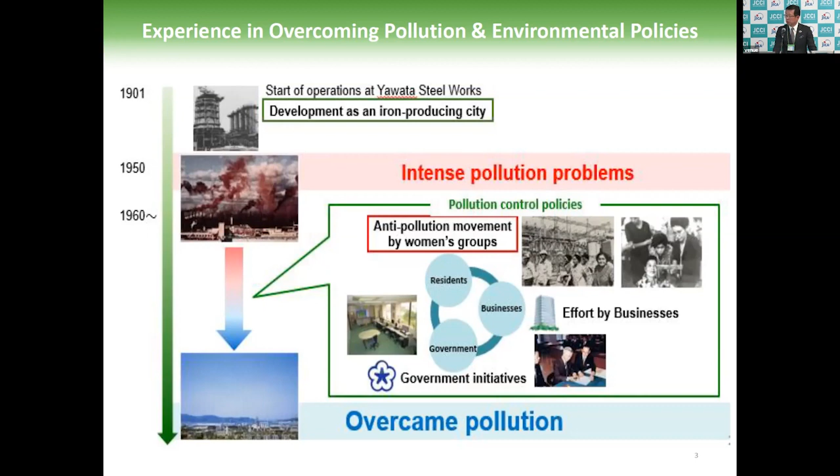Those that were first to take action against pollution were the citizens, including the women's associations. Such action led to a concerted effort by citizens, companies, and the government to reduce air and water pollutants, and through that effort, the city was successful in overcoming pollution.

Based on this experience, the citizens of Kita-Kyushu, including companies like ours, are working together to make Kita-Kyushu a model city for decarbonization in Asia. Various initiatives are being undertaken. We also want to take the environmental technologies and know-how that we developed overseas to support the resolution of issues such as decarbonization and contribute to the achievement of the SDGs around the world.

One of these activities is forest and peat fire control using soap-based fire extinguishing foams, which I will now explain. Our company's philosophy is to protect healthy body and clean water.

Founded in 1910 in what is now Wakamatsu-ku, Kita-Kyushu, Fukuoka Prefecture, this year marks the 113th year since founding. The head office is still in Wakamatsu, Kitakyushu City, with a branch office in Minato Ward, Tokyo. Our main products are additive-free household products such as soap, shampoo, and laundry soap.

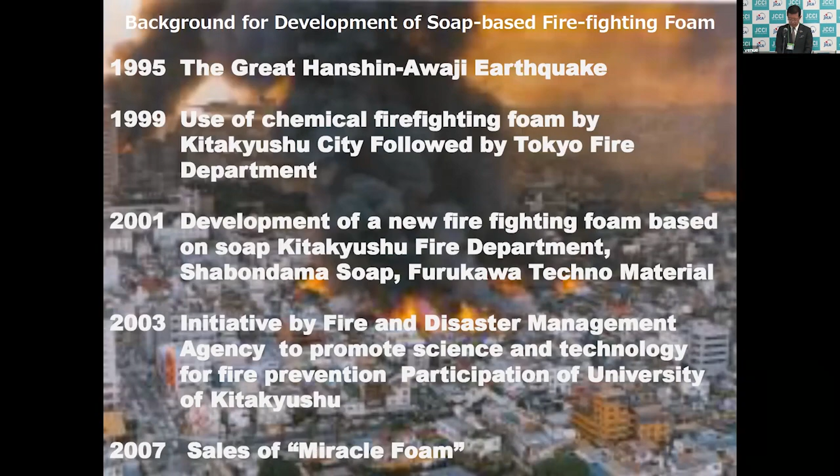So our company, as I explained, has consistently produced environmentally friendly products, and we were asked to develop a new fire extinguishing agent based on soap. We started development in 2001, and with the support of the national government and the University of Kitakyushu, we went through 7 years of iterative research and demonstration, culminating in the completion of a soap-based foam with world-leading environmental performance in 2007. Soap-based firefighting foam has 3 main characteristics.

First, they are highly effective in extinguishing fires by reducing the surface tension of water, increasing its penetrability, and lowering the temperature of burning materials. The second is a feature unique to soap-based agents: the foam decomposes after extinguishing the fire without staying in place indefinitely. Thirdly, it is environmentally friendly, which is of paramount importance today.

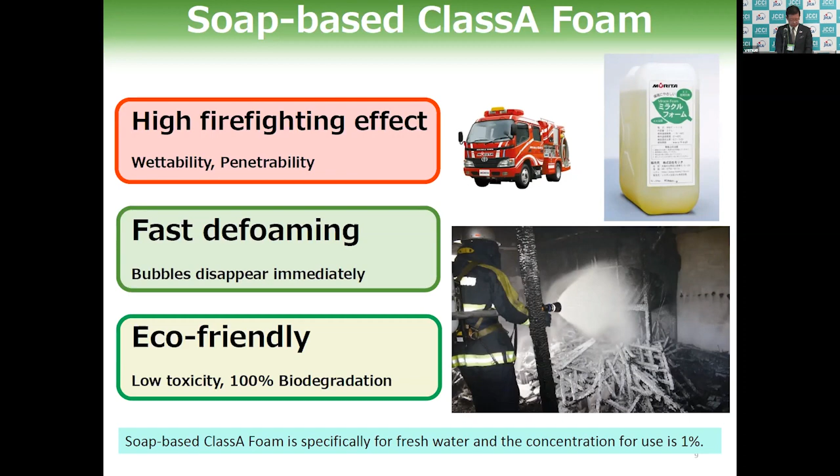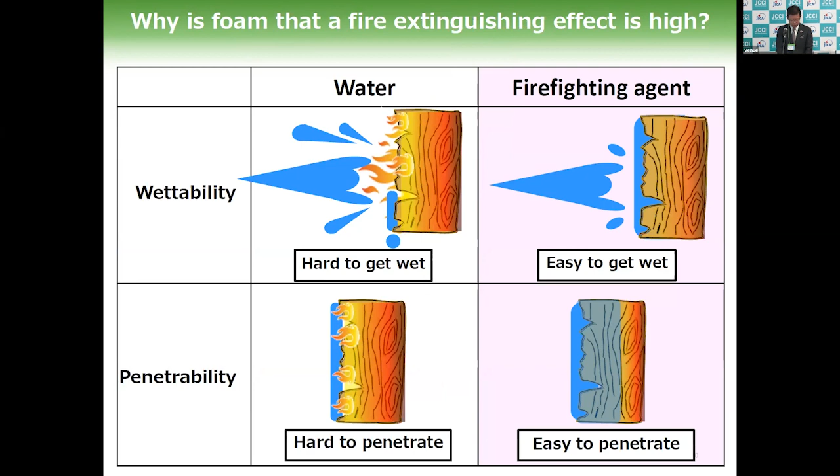The reasons for the high firefighting performance are: first, the surface tension of water is reduced by the extinguishing agent, increasing its wettability, so the agent is not bounced off the burning material easily. Simultaneously, by increasing its penetrating power, it efficiently removes heat and energy to prevent the fire reigniting.

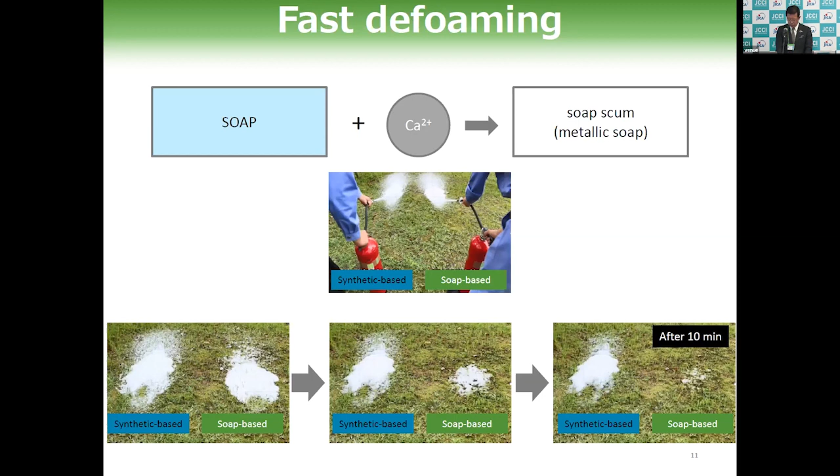The foam rapidly defoams after application as the soap combines with minerals in the ground and returns to nature. This picture shows a comparison of the difference with chemically synthesized foams: the soap-based foam disappears after just 10 minutes, whereas the synthesized one hardly disappears. The good defoaming allows fast and safe cleanup and damage assessment after a fire, so it also reduces the total cost.

In addition to the fire extinguishing performance and good defoaming, the most important thing we have considered is environmental friendliness, which, as I explained at the outset, has been a focus of the whole city of Kitakyushu. The main features include low toxicity to aquatic organisms, biodegradability so that the ingredients do not remain in the natural world, and no effect on plant growth.

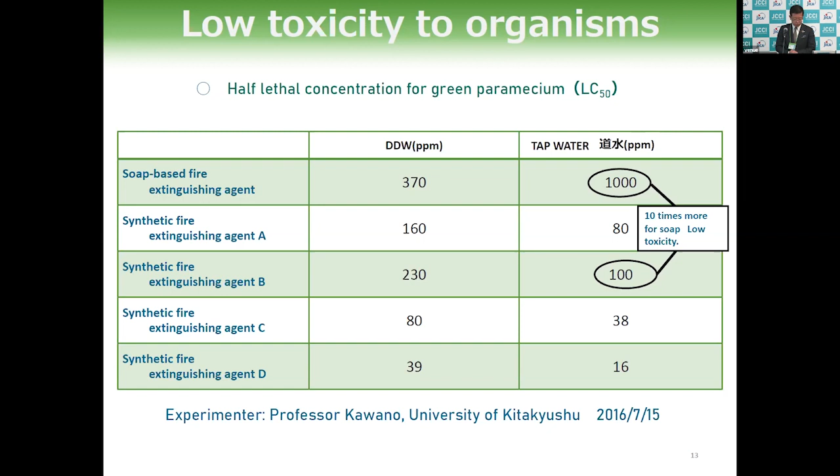Next, this table shows at what concentrations of soap-based and synthetic fire extinguishing agents mixed with distilled and tap water kills half of green paramecium. This is experimental data from the University of Kita-Kyushu. It shows soap-based agents to be about 63 times less ecotoxic than some synthetic foams and about 10 times less toxic than the best performing synthetic foam.

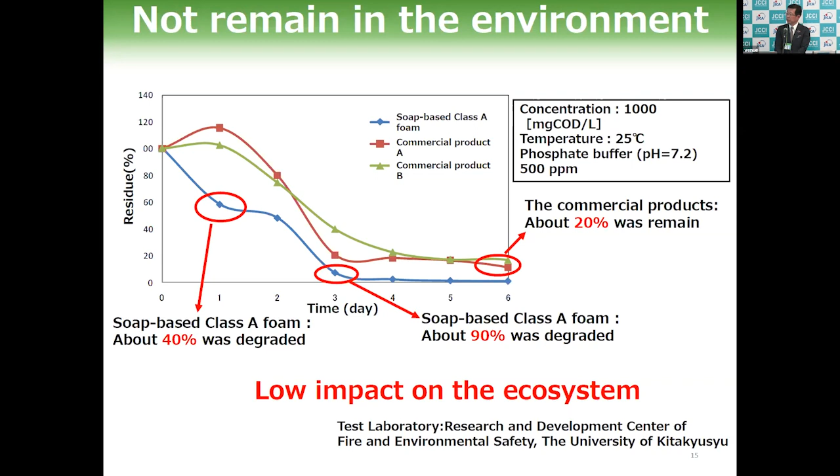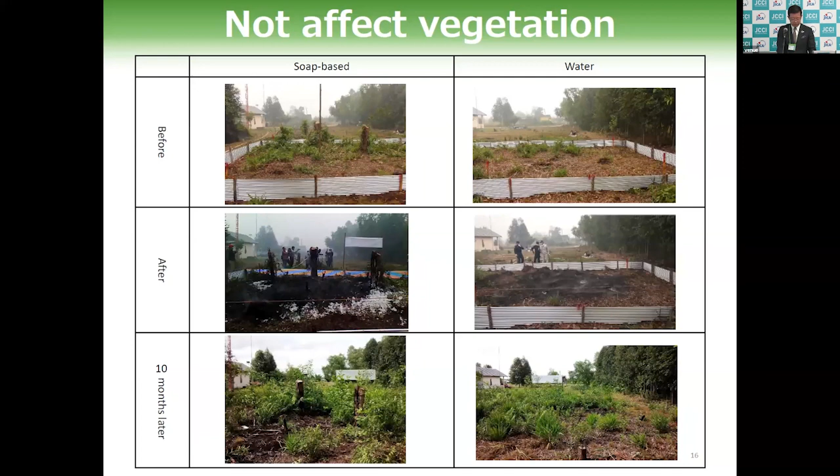What this photo shows is a part of a demonstration project to combat peat fires in Indonesia. Vegetation was burned under the same conditions, and the comparison was made 10 months later between fire extinguishing with water alone and with a soap-based foam. It's shown that grass and trees sprouted, exceeding the original vegetation, demonstrating that the soap-based foam had no effect on vegetation.

In a previous forest fire of similar scale, firefighters extinguished the fire using only water, but more water was required and it took longer to extinguish the fire. Although simple comparisons cannot be made because the conditions were not exactly the same, the amount of water required was 1.7 times greater, the time taken was 1.5 times greater, and the area burned was approximately twice as large than when soap foam was used.

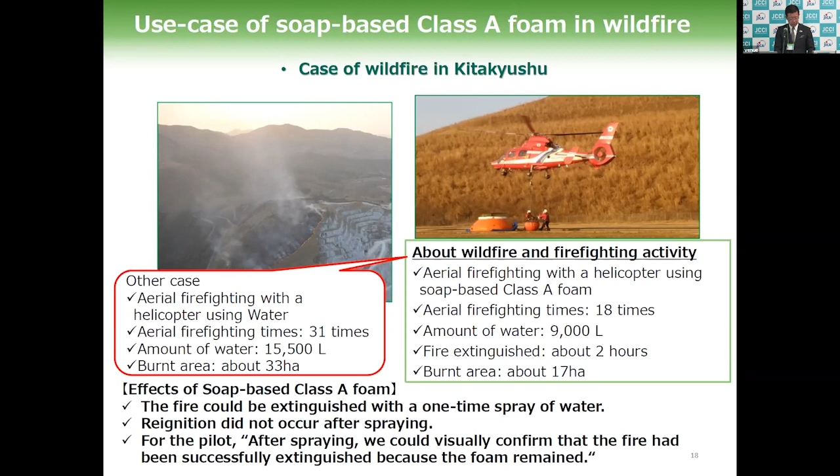Next, as an example of use other than actual fires, here's an example of use in securing safety during field burning. In Hiraodai, a limestone plateau in Kitakyushu City, in order to prevent forest fires damaging houses and crops and to ensure the safety of tourists, the local residents cooperate in burning an area of approximately 340 hectares in February and March every year. It's been planned for February this year as well.

340 hectares is equivalent to the area of about 380 football fields. The Kitakyushu Fire Department provides support by spraying soap-based firefighting agents around the perimeter of the area to be burned, in order to prevent the unintentional spread of fire.

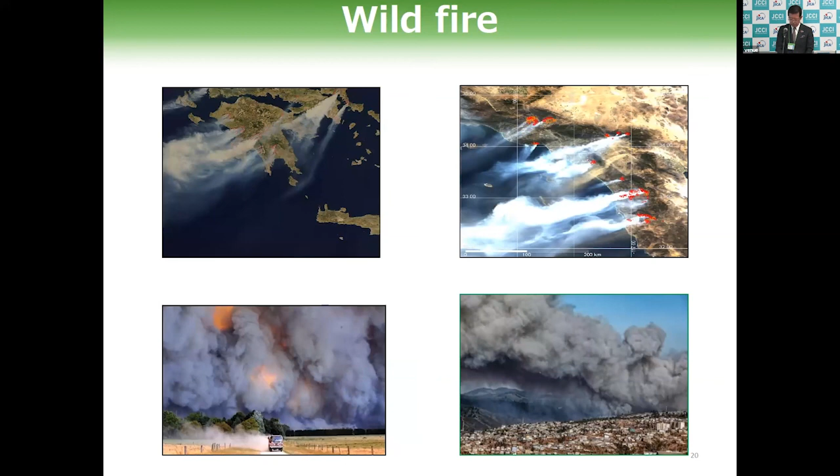As I've explained, soap-based fire extinguishing agents, which combine fire extinguishing performance, environmental performance, and good defoaming, are now attracting attention as a concrete and effective countermeasure for forest fires, which is an urgent issue worldwide. Soap-based firefighting foams have been introduced in various countries, mainly due to their excellent environmental performance. And in several countries, they have moved from demonstration stage to practical use.

We hope that your country will make use of this for the protection of forests and the environment, and we look forward to cooperating with you in reducing carbon emissions and protecting the global environment. That concludes my talk. Thank you very much.

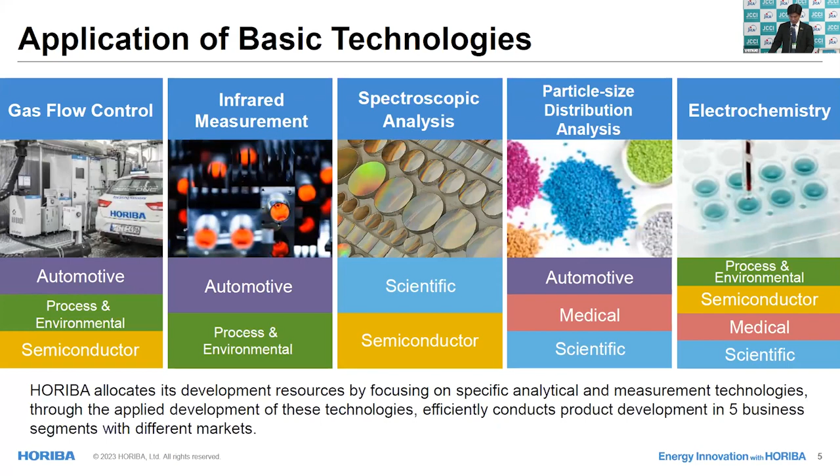This slide shows the outline of our business domains. Since we are mainly engaged in B2B business, our products and services are rarely seen directly by people in their daily lives, but they support people's daily lives everywhere based on measurement technologies. HORIBA has 5 distinctive core technologies: gas flow control, infrared measurement, spectroscopic analysis, particle size distribution measurement, and electrochemical analysis. We apply these technologies to our automotive, environmental, medical, scientific, and semiconductor businesses, and conduct business based on the keyword of measurement.

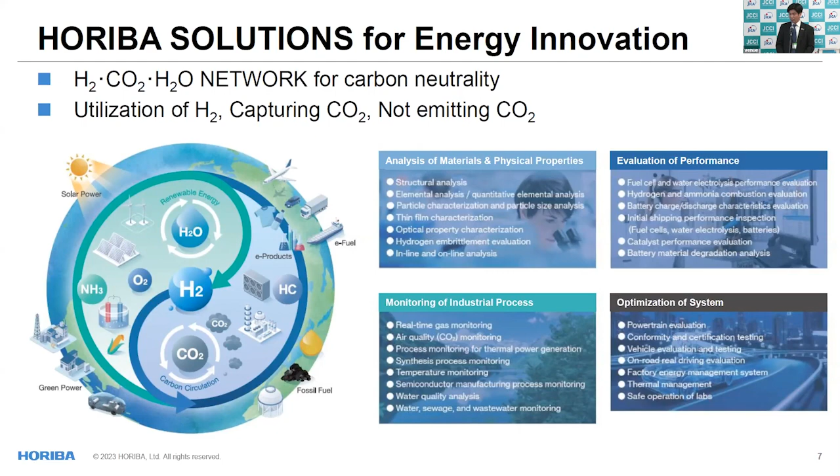To achieve a carbon neutral society, it's important to avoid emission, capture carbon dioxide, and utilize hydrogen. These 3 are key actions. HORIBA is focusing on circulation of hydrogen, water, and CO2 through the 4 technologies shown here: analysis of materials and physical properties, evaluation of performance, monitoring of industrial processes, and optimization of the system.

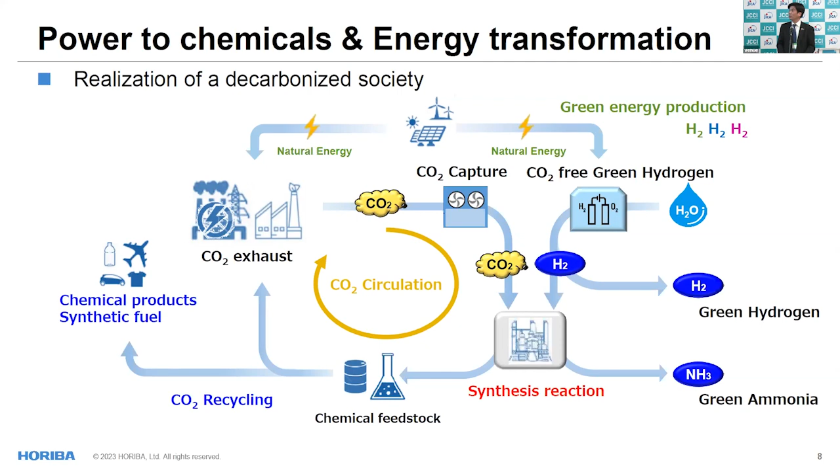Here's one example. The main part of this process is the synthesis of hydrogen and CO2 to produce fuel. From a carbon neutral point of view, the hydrogen used in this process must be green or purple hydrogen, which does not emit carbon dioxide during production, or blue hydrogen after carbon capture. CO2 must be recaptured from the emissions of the combustion process. This process creates a circular cycle in which CO2 is trapped and not emitted outside.

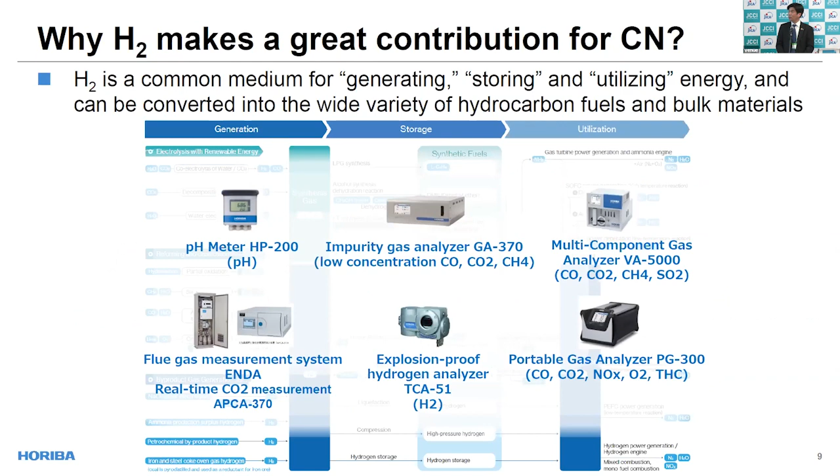Throughout this conversion process, HORIBA's scientific analysis and pH meter, gas analyzer, and gas monitor can contribute to the technological development and energy production toward carbon neutrality.

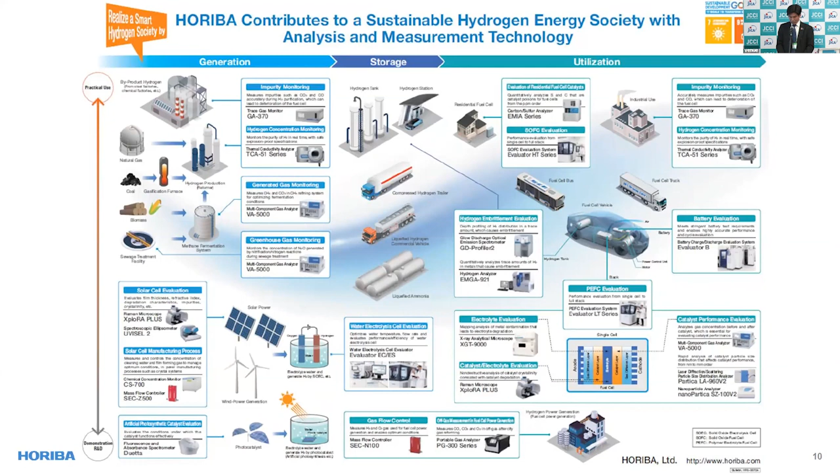Recently, use of hydrogen is becoming important. This diagram shows applications HORIBA can propose for the production, storage, and use of hydrogen. When producing hydrogen, measuring the concentration of impurities in hydrogen during the production process can lead to a reduction in hydrogen production costs. While many new materials are being developed for the use of hydrogen in fuel cell vehicles and household fuel cells, HORIBA's scientific analysis equipment is used for these purposes, including systems for fuel cell evaluation, our analysis equipment used in diverse fields of hydrogen.

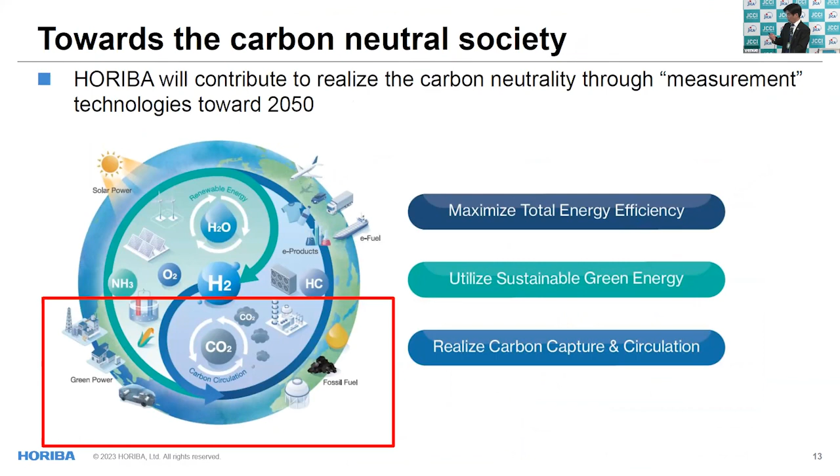Let me touch upon the measurement needs for CO2 recovery. In the US, Section 45Q was introduced in August last year, which is a substantial tax credit system for CO2 recovery and storage, expected to invigorate the CO2 recovery market. As I mentioned earlier, the presence of overseas offices around the world should help HORIBA access the up-to-date CO2 recovery market information.

In CCS plants that capture CO2, we have grasped the three latest customer requirements. One is the monitoring of CO2 concentration during transmission through a pipeline or burying underground to calculate the amount of tax credit customers can receive.

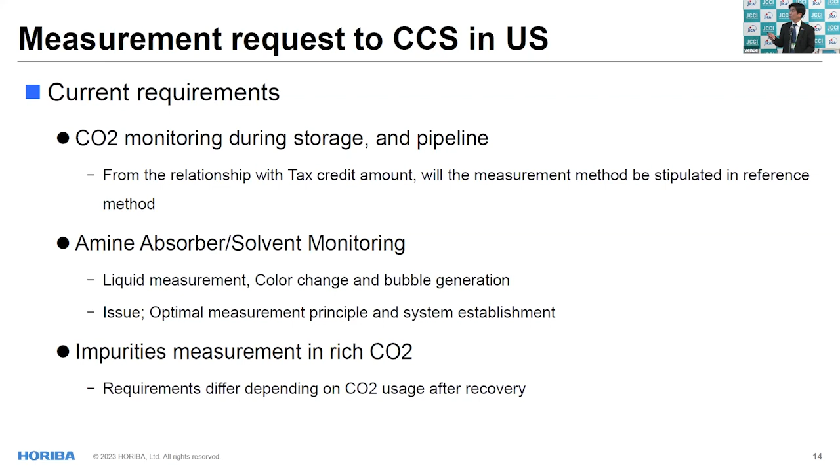Next, I will explain about the deterioration of amine solution used for CO2 recovery and the need for monitoring impurity concentration during CO2 recovery. Amine solution is used to recover a large amount of CO2. It reacts with CO2 at low temperature in the absorption tank and releases CO2 after high temperature reaction in the regeneration tank. The process is repeated to recover more CO2.

Our gas analyzers and liquid analyzers are used in these types of plants. Gas analyzers are used in front of the absorption tanks, as well as inside. Amine solution tends to deteriorate due to repeated cooling and heating processes.

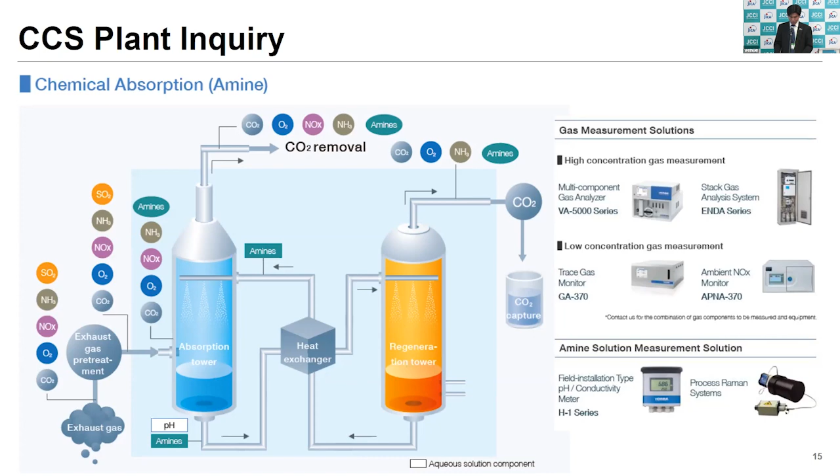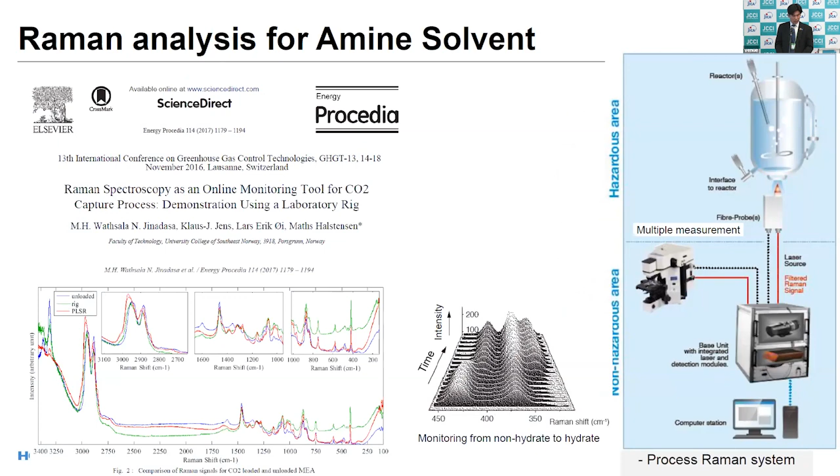By using this IRLAM technology, we can detect certain peaks that were difficult to detect with the conventional infrared absorption measurement principle, thus reducing the influence of the base gas while performing more accurate measurement. In addition, the device is capable of wet sampling, where the gas in the pretreatment section and the analysis section is heated and aspirated so that the target can be measured without dehumidification, even if it contains moisture. Those low concentration substances can be measured for better management of CO2.

As I said, in my company, through measurement technologies, we are trying to contribute to the carbon neutral society for renewable energy and new material development, gas measurement for CO2 recovery, and gas measurement for CO2 recycling. Our gas and chemicals measurement systems are instrumental for all of these four areas.

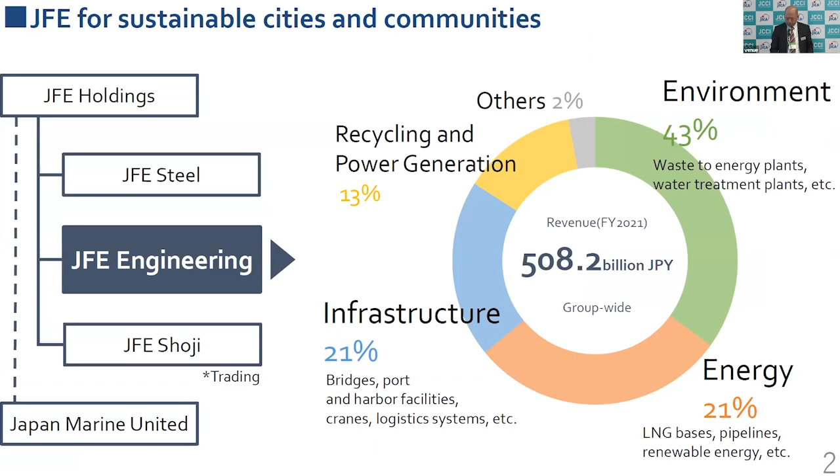It's a very great honor to make this presentation about waste management solutions for carbon neutrality and also the circular economy. JFE Engineering is the engineering business arm of JFE Group. The JFE Group is one of the largest corporate groups in Japan. JFE Engineering works in various types of infrastructure business, such as environment, energy facilities, infrastructure like bridges, and also the recycling business in this global market.

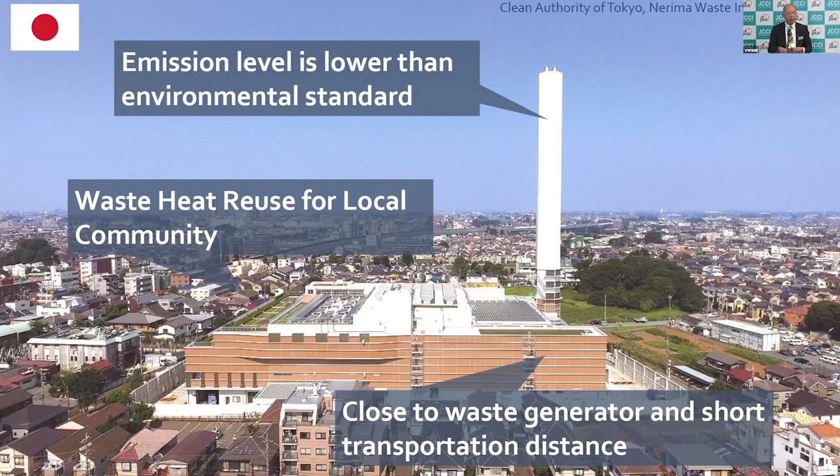Electricity or hot water is supplied to residents nearby from this very safe and secure plant. Also, since this plant is very close to the source of waste, it not only reduces transportation costs, but also reduces dust, odor, and noise during waste transportation.

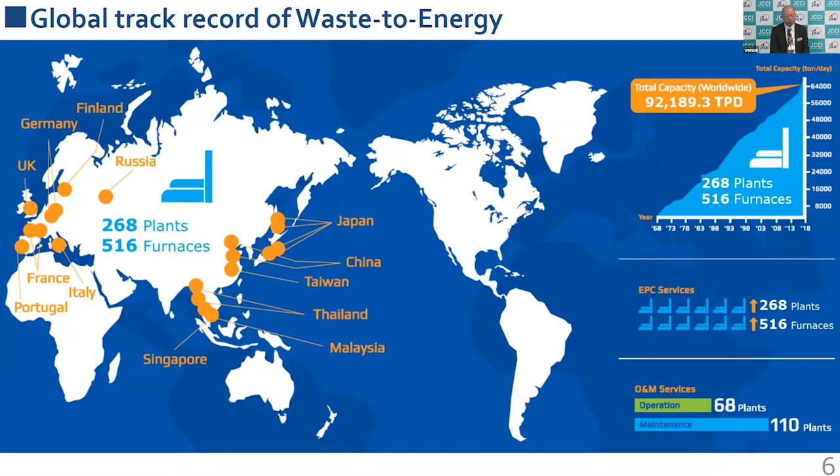We at JFE Engineering have a very large number of global track records of waste-to-energy incineration plants, not only in Japan, but also in Asian countries and European countries as well. From this track record, I'd like to introduce JFE Engineering's very latest case.

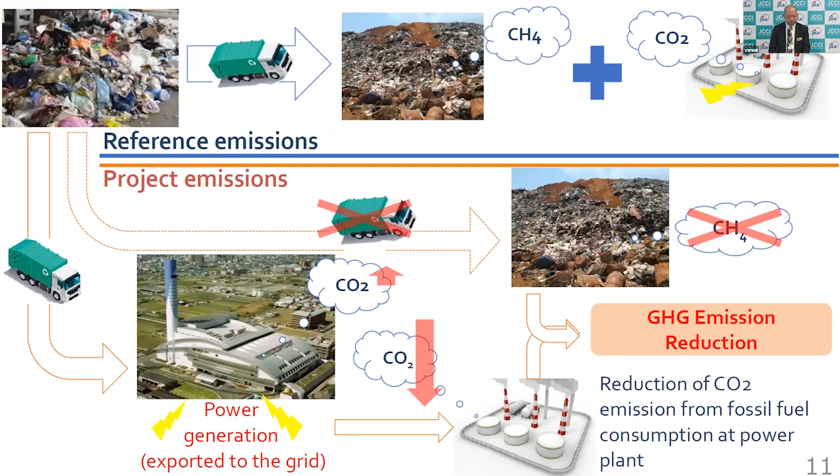The electricity generated by the waste-to-energy incineration system displaces electricity from a grid which is generated using fossil fuels. For the most appropriate waste management, in addition to the 3 R's, energy recovery at the waste-to-energy plant and proper dumping or proper landfill - these two additional items must also be carefully considered if we are thinking about a circular economy for your country, for your residents.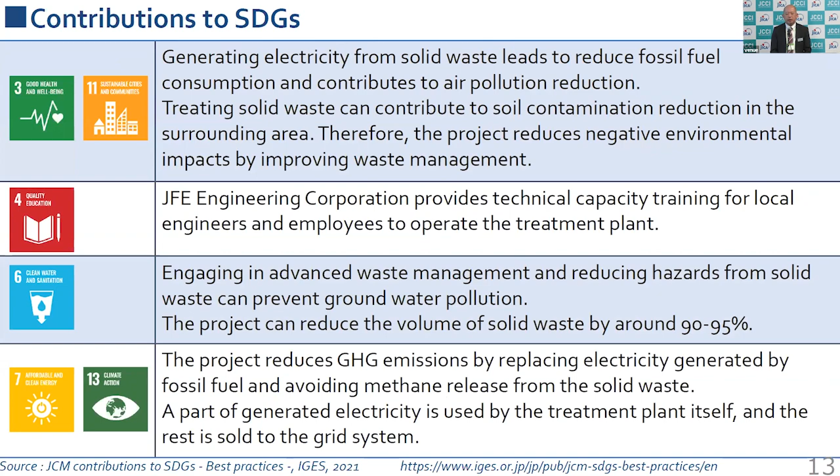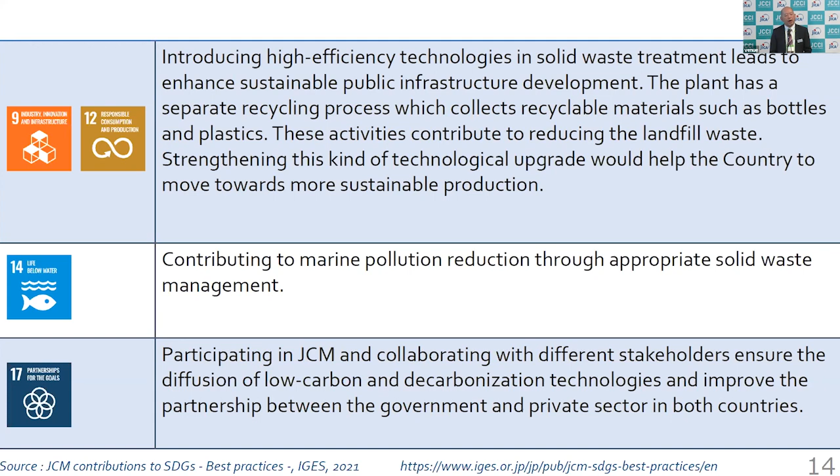As I explained, because of these kinds of multi-benefits by the waste-to-energy incineration project, the technology is also clearly recognized. It would also contribute to various SDGs for the people - not only number 3 and number 11, but also, for example, number 9 or number 12. If we are thinking about the marine plastic waste issue, it is also very good for SDG number 14.

JFE is just for the Earth. So if you're reading only the big characters, 'just for the Earth', you can kindly find our company name, JFE. So our mission, JFE's mission, is to create a safe and secure society to strongly support people's lives and to pass this on to the future generation. This is the end of my presentation. Thank you very much.

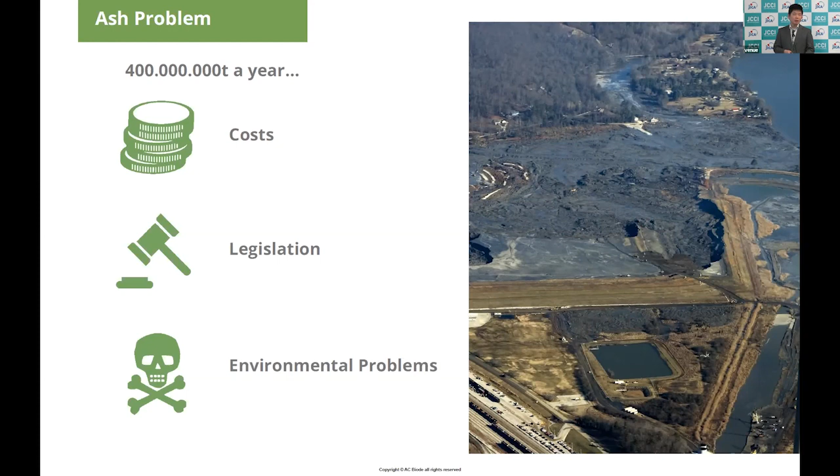Ash or waste is one of the biggest problems, mainly from biomass power plants, coal-fired power plants, municipal waste incineration, paper facilities, sewage sludge incinerators, as well as mining waste. It costs quite a lot of money—100,000 or millions of euros every year just to dispose of this waste, because it includes heavy metals and is not easy to handle.

Right now, ash mainly goes to landfills or is mixed with asphalt or concrete for construction materials, which is a lower value use than it should be. So we upcycle this waste into adsorbent in powder form, as you can see here. This powder can be used as adsorbent, such as filters to capture CO2 and methane.

It can also be used for soil improvement, water treatment, and capturing nuclear waste such as cesium. We have already commercialized and are selling these products mainly in Japan and China, and want to expand this business into different countries.

Here's one example where it captures CO2. It is equivalent to zeolite, which is already in the market, but we are the only one in the market that upcycles from waste.

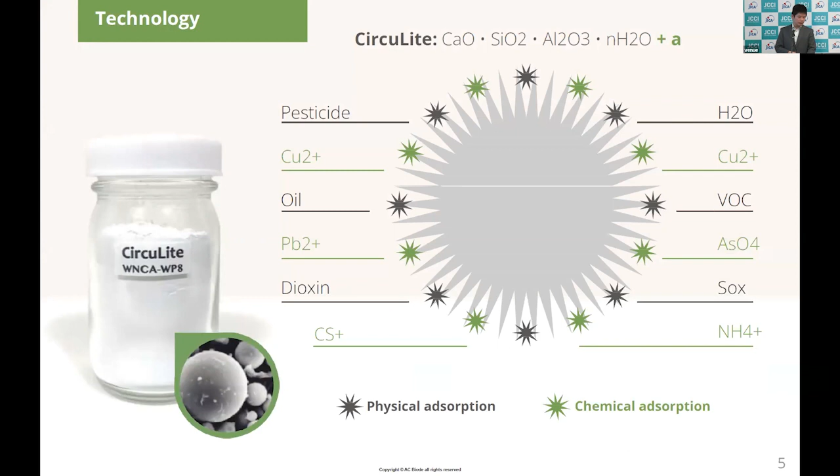This is how our products look. It captures not only physically, but also chemically through an ion exchange structure, so that we can expand or improve adsorption capability.

There are existing products called activated carbon, or kasseitan in Japanese, and zeolite. Compared with existing products, as I mentioned, we are the only one that recycles from waste. Our production costs are cheaper, and the adsorption capability is also higher.

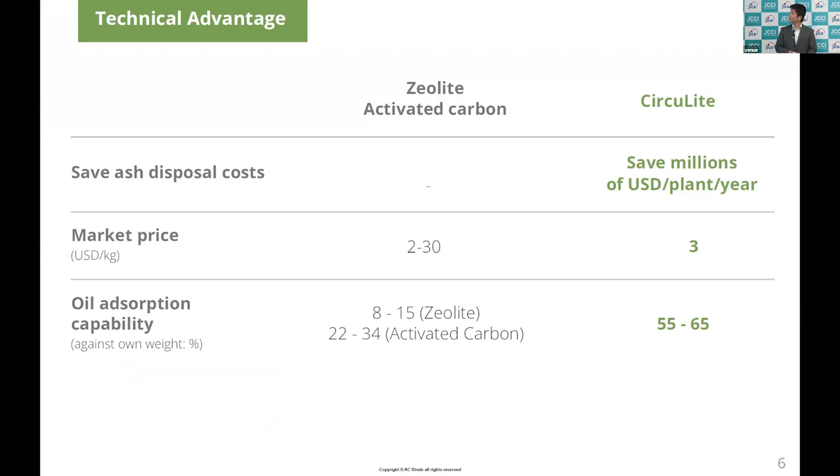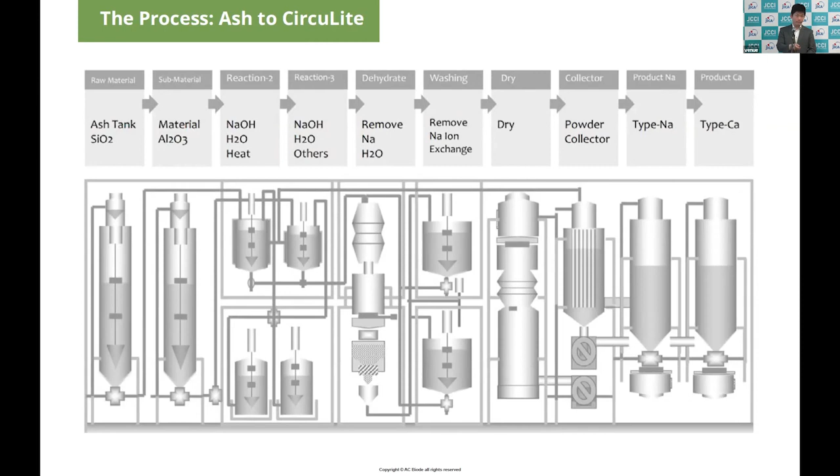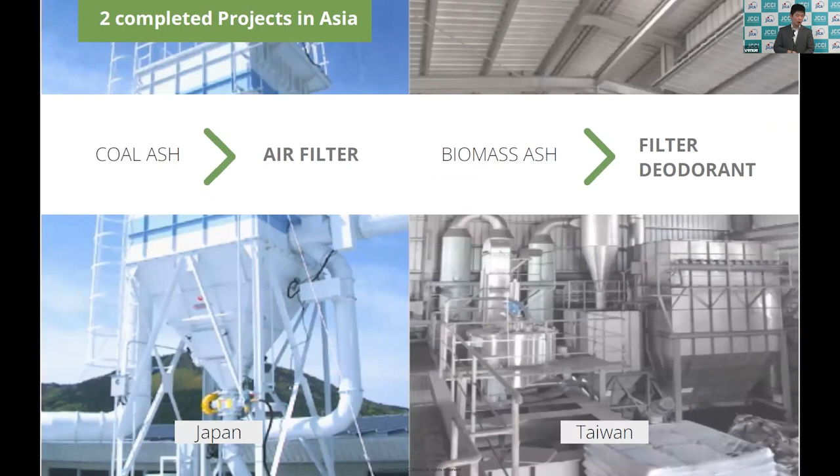With Seon Corporation in Japan, we have built two facilities successfully—one in Japan from coal ash, and the other in Taiwan from biomass power generation.

Right now we have around 12 contracts, such as in Kazakhstan, Thailand, Australia, Austria, Italy, and the UK, as well as one project in Bangladesh to recycle coal waste.

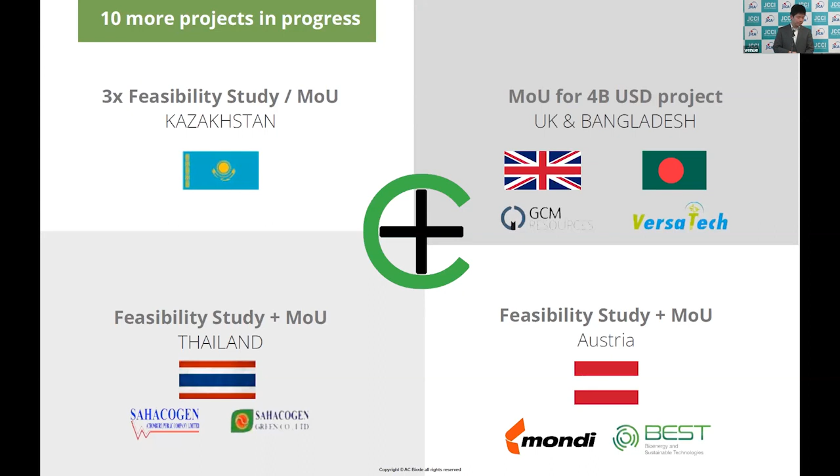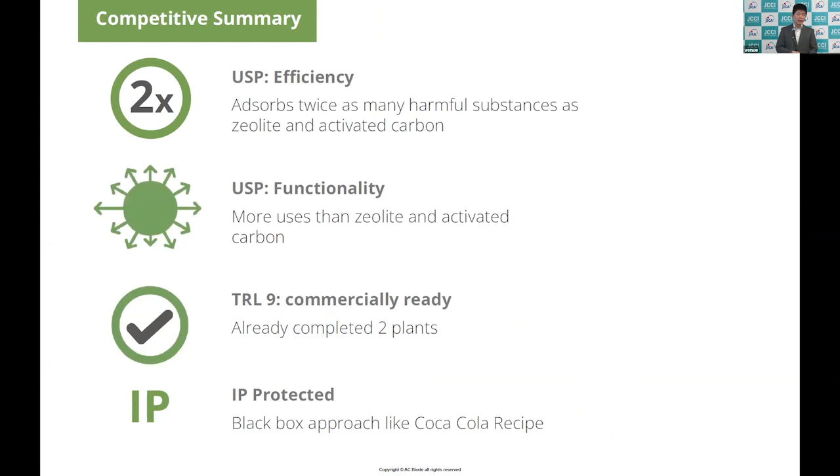To summarize, as far as we know, we are the only one recycling ash into adsorbent and have already commercialized it into the market, as well as secured some know-how, recipes, and a patent on this.

In terms of how we do business, we don't make machines or build facilities ourselves, but we provide engineering services to the owners of ash generation or waste, such as energy companies or paper companies.

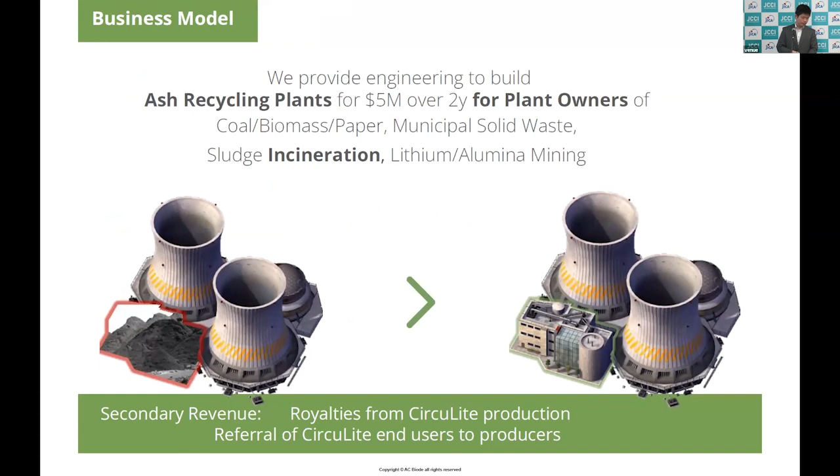The market itself is growing steadily at around 3.4% for each adsorbent market, so we want to tackle a couple of market shares within the big adsorbent market.

Right now, our startup is still young, only 3 years old. We now have 10 members, mainly engineers—chemists, mechanical engineers, and chemical engineers. We have raised funding from a venture capital firm within the European Union called EIT InnoEnergy, and also just last year raised funding from Genesia Ventures, a venture capital firm in Japan.

So that's it for now. If you have any questions, either in English or Japanese, please feel free to reach out to me. Here's my email address, and you can ask me any questions.

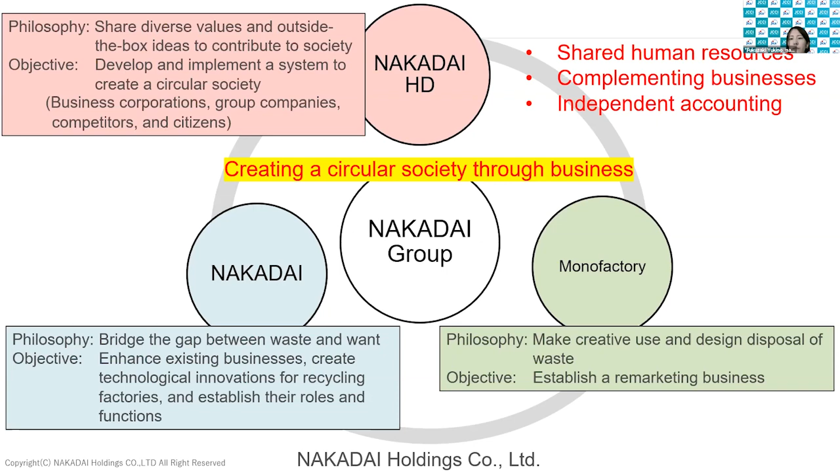These are the philosophies and purposes of each entity, but I will skip this slide. The point is that we are supplementing and complementing each other to create a virtuous cycle.

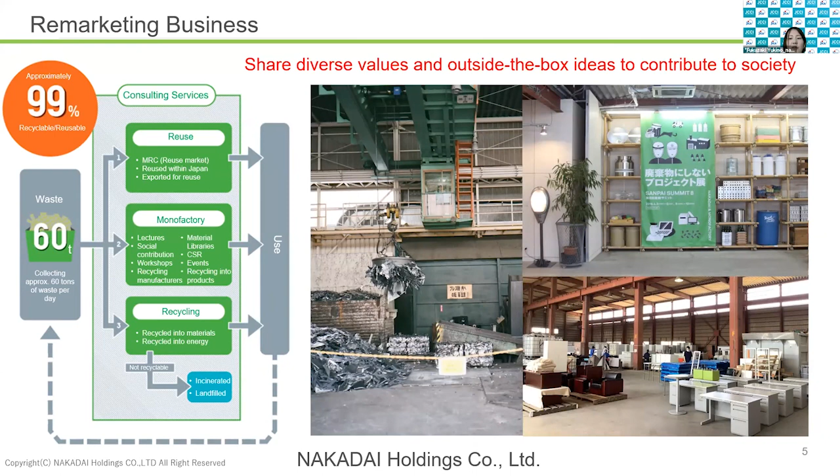Our group is conducting a so-called remarketing business. It's not only recycling or reuse. Once waste is generated, the point is how to recycle it back into society, and before something becomes waste, how we can make sure it is recyclable. That's the perspective we are taking.

Specifically, in terms of the amount of waste we handle, let me talk about some numbers. Our company is located in Gunma Prefecture, but Japanese waste management is a licensed industry, so it is strictly regulated by law. We cannot unlimitedly expand the facilities, so even if assembling a lot of waste would be good for us, we can't do that. Therefore, we focus on the process, and on the needs and demands of the people who generate waste and the people who want to utilize it.

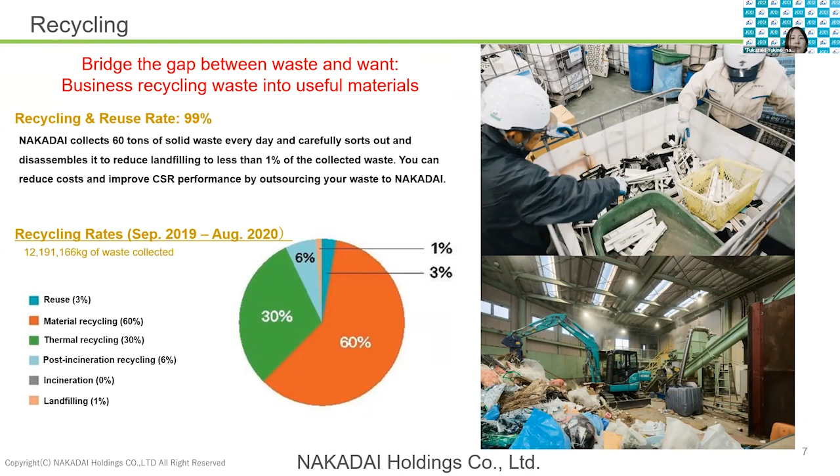About 60 tons of waste comes to the plant, and we achieve 99% recycling. We use large facilities and equipment, but we focus on the generation of new materials. Therefore, decomposition and cleaning is done by hand, manually, and our employees know that once they touch something, they can tell exactly what material it is. So we have highly skilled employees.

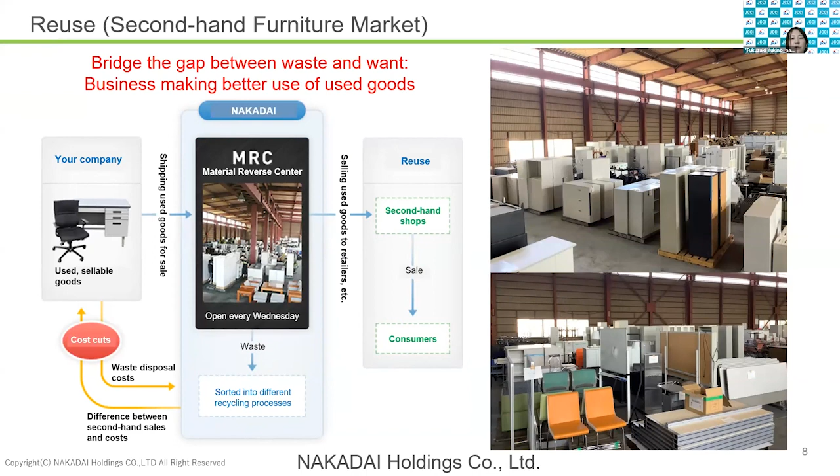It's not only recycling, we also do reuse business. As you can see in the picture, we have office equipment like lockers, tables, and chairs, and we have a marketplace. Every week, a 10-ton truck worth of used office equipment comes in, and then we run an open market and marketplace system.

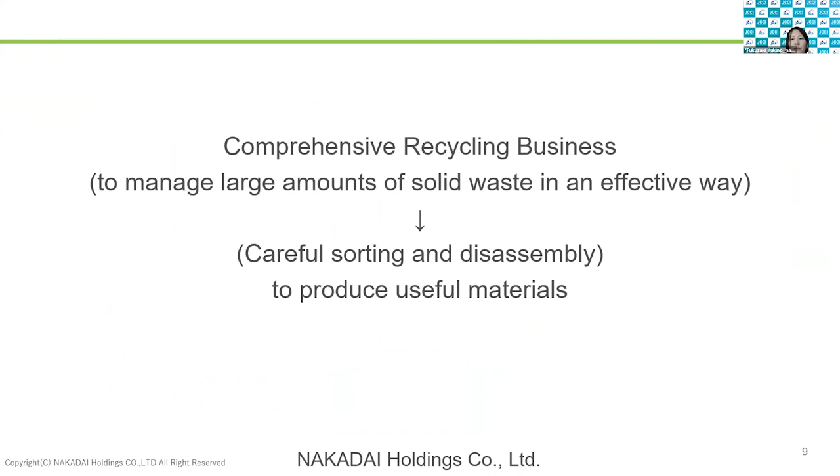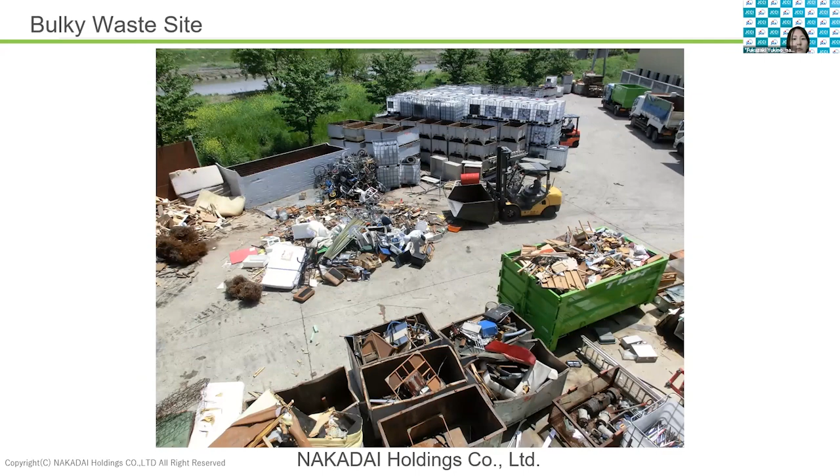We use manual work in the sorting and selection of waste so that we can still retain the value of used equipment. This is our facility. There are many visitors; in the summertime, lots of children come for the plant tour. Manual work is important, but we also deal with general waste coming from households.

It's not only recycling, we use waste for other purposes. This shows our material library. For each type of material we sort, you see a very interesting set of materials available from waste. We just put them together on display, and it makes a very interesting display. We also sell those raw materials.

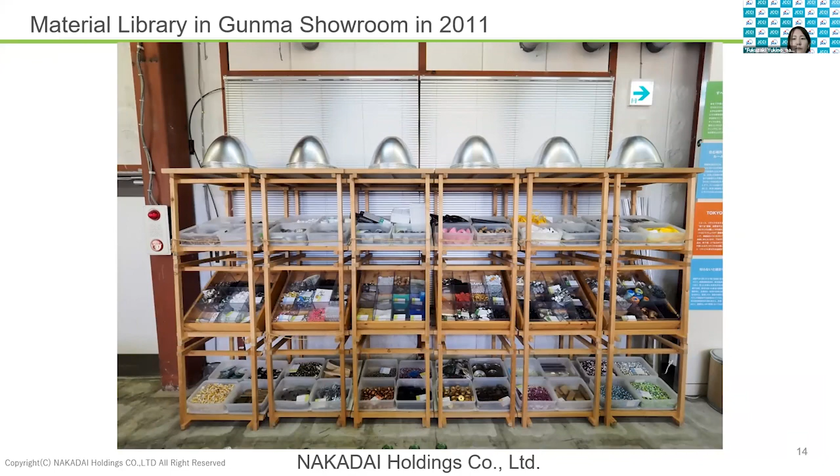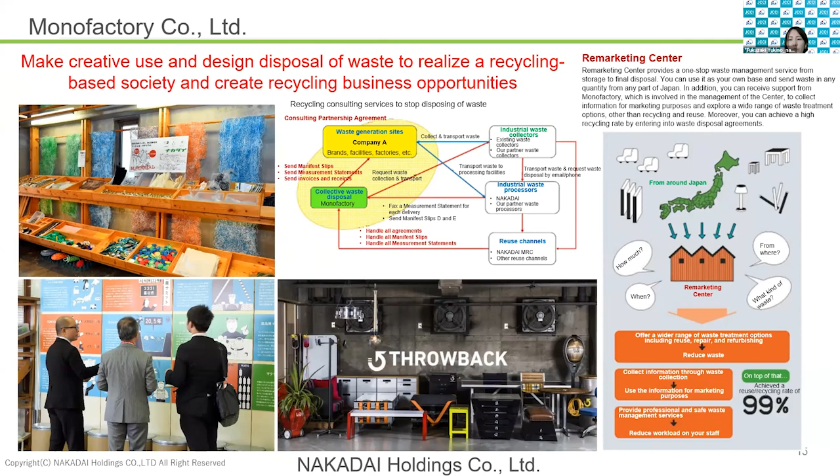The materials themselves are displayed, but it's not only that. We try to prevent the generation of waste and create mechanisms for collection and recycling. We provide a consulting service. When waste is mixed with different things, sometimes it becomes uncontrollable and it's very difficult to put it back into raw material. But before someone disposes of any equipment, if we take action, we can increase the chance of recyclability. That's why process design is very important.

Next, I'd like to talk about turning waste into business purposes. This shows plastic waste reduction efforts, which you may be aware of. In 2018, China banned imports of plastic waste. In the past, China was importing a lot of waste from Japan and other countries, but then they stopped importing that waste. So domestically, we have a lot of waste stagnating.

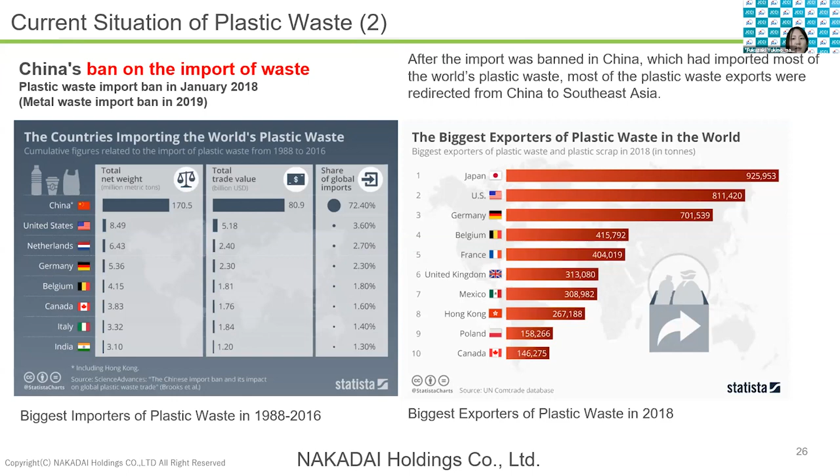We are trying to export to Southeast Asia, but there is more and more regulation on this waste. Because of this regulatory situation, it was shocking that China banned these imports. It was a big topic in our industry, because suddenly the door was shut and we had to deal with all the waste in Japan. The fact that we have to deal with waste generated within Japan may sound absurd, but in fact, Japan didn't do that in the past.

So we have to have a recycling system which does not rely on other companies, other countries. If we don't do anything, people cannot dispose of waste so freely. For example, per month, a 45-liter bag, maybe only 2 will be provided for each household, and then households cannot dispose of things so freely. So rather than just selling, recovering the waste and recycling from waste will be key critical questions for the country as well as for society as a whole.

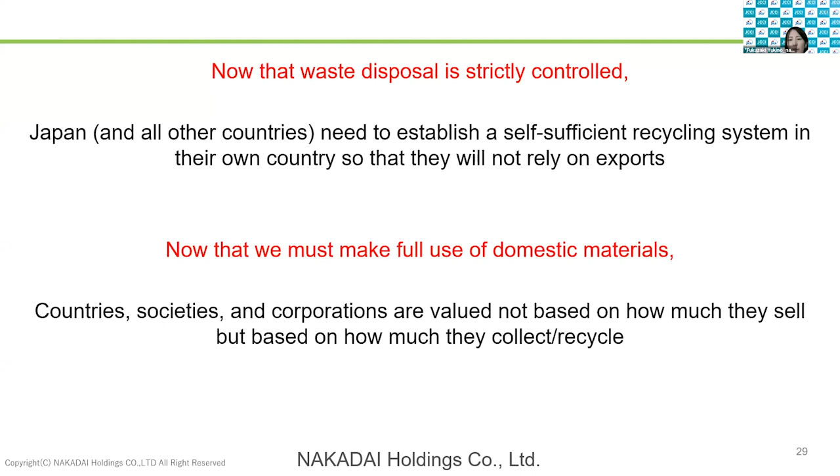Having said that, the recycling system in Japan, well, it is not so easy as it may sound. But we have a new initiative together with Kyushu Electric Power Company called Circular Park Kyushu.

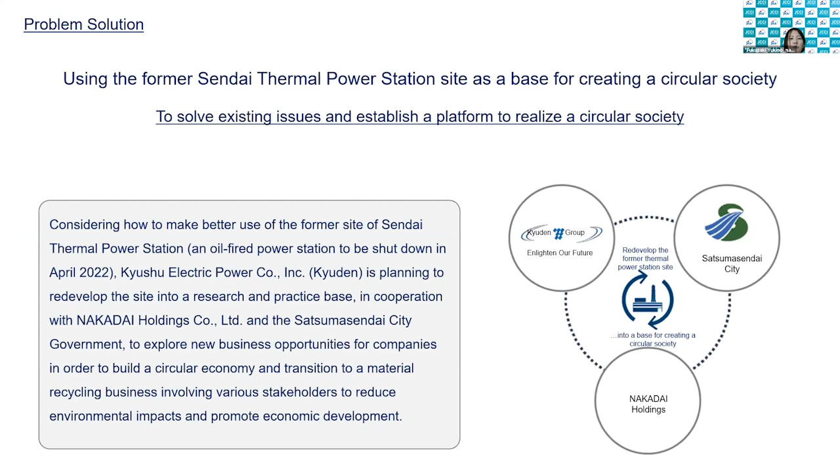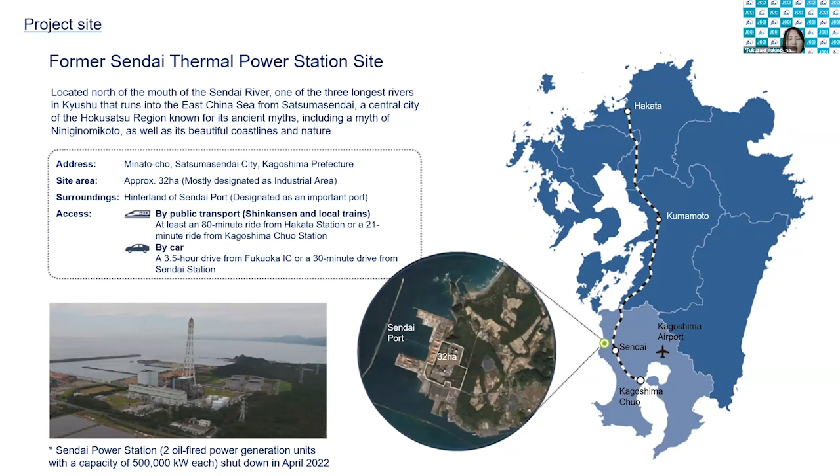The green circle part shows the exact location of the plant. And this is an open innovation in order to realize that this location will become the center for such collaboration.

Lastly, let me show you the flow of waste and how we can utilize this for education purposes for companies as well as for consumers. We let people try and do the recycling by themselves, and also together with university students in group work, we try to segregate different waste into different resources through the workshop they experience.

And the kids come to the facility, and they decompose PCs, for example, to see what kind of materials are included. So Japan is trying to establish a recycling business from now. To the rest of the world, well, we have a common issue, the waste problem. So we would like to promote collaboration with other countries as well. That's all from myself. Thank you very much.

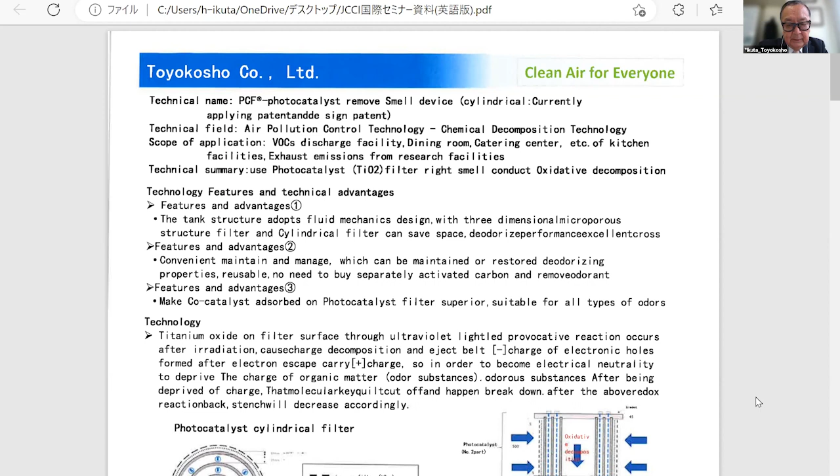So the technology itself, well, we have titanium oxide. This is the photocatalyst. Basically, we have the sheet type. Our technology's focus is to decompose the source of odor.

I do talk about some characteristics in this document, but if I talk about the cylindrical type, in the past it was just a flat type, but by making it into a cylinder or column, we now have these 3D cell filters and cylindrical cartridges. So this really saves space.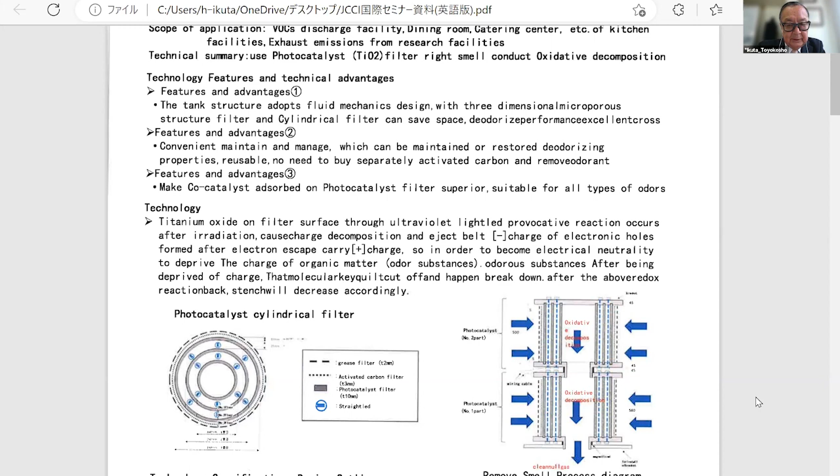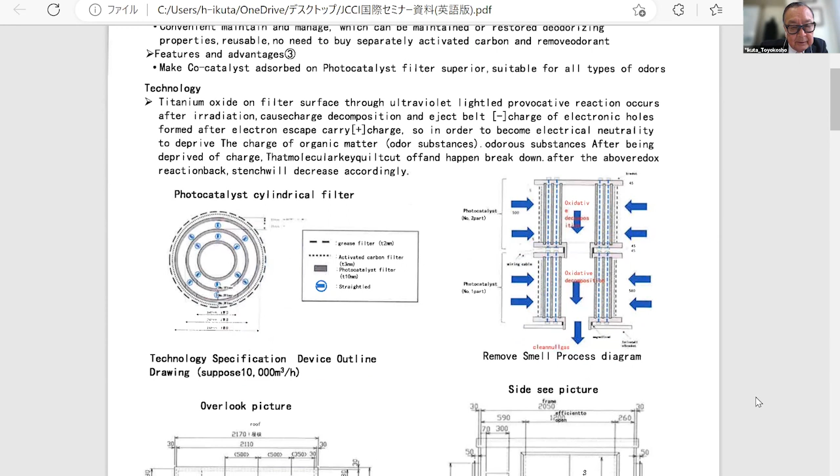And also, the deodorizing capacity has been reinforced. It may be a bit difficult to see here, but basically, if you look at the cylinder, it's a 5-layer structure: there's the grease filter on the outside, then there's the activated carbon filter, and then there's the photocatalyst filter.

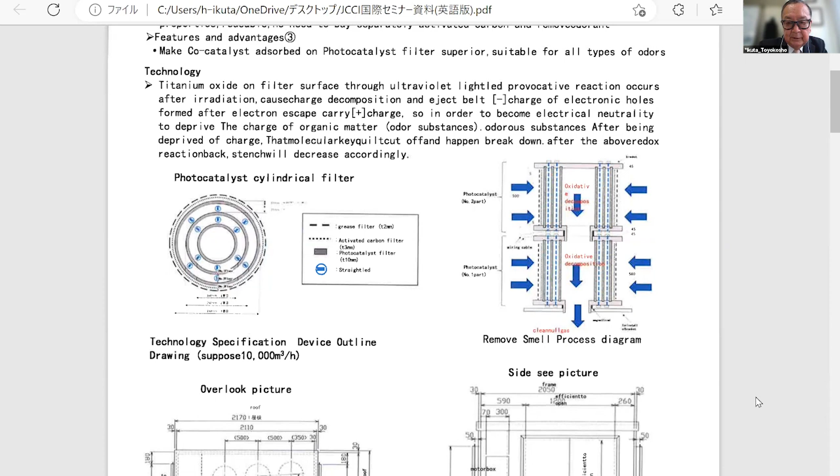So it will be attached top to bottom, that's 2, plus it's going to be positioned in parallel. So this is a 360 degree device to absorb the odor to be decomposed. Oh sorry, that's a cross section, so that's 2 cylinders on top of each other. So you've got layer 1 and layer 2. It's connected, but you can actually connect maybe 3 or 4 of these cylinder devices.

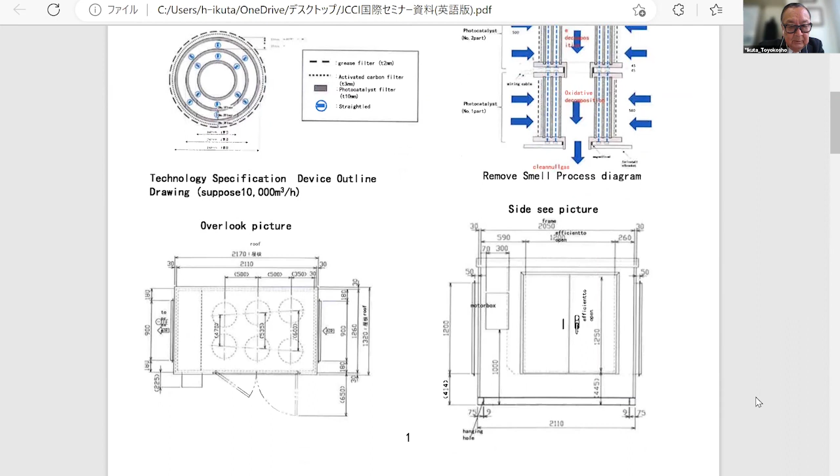And then on the bottom, this is a cross section looking at the device from the top. So there are 6 cylindrical devices, and because it's connected, we have 12 units here in this casing because they're connected on top of each other. So you come out from the right, coming from the right, and then you go through the left. So as the atmosphere travels, the odor is absorbed and the titanium oxide does the decomposition.

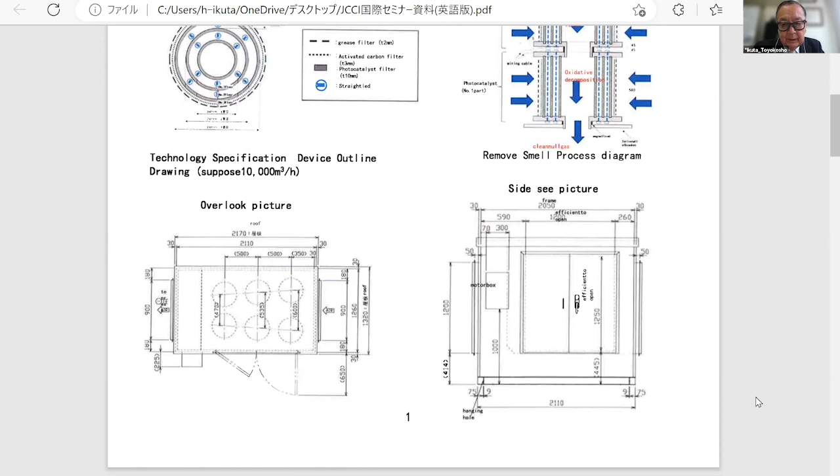And the right one, we see the side picture. This is the casing diagram. So if you look at the left and the right-hand side of this casing, you can see how it will look. It might be a bit difficult to imagine, but this is what we filed in our patent submission.

With regard to this deodorizing performance, according to our test data, based on the Kanagawa Industrial Institute test method, for acetaldehyde and toluene, all of that included, we have been able to achieve more than 90% of deodorizing performance.

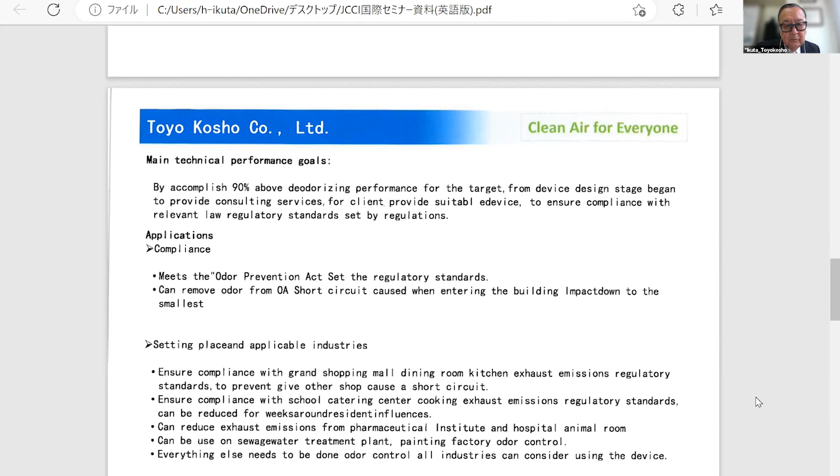So from the design, we provide consulting to design the device. Some applications or examples - basically in Japan, this is so that people can meet the offensive odor control law. And also, Japan, Taiwan, Korea, China and Thailand actually measure, and also maybe Vietnam very shortly - they have the same measure of odor according to these legal regulations.

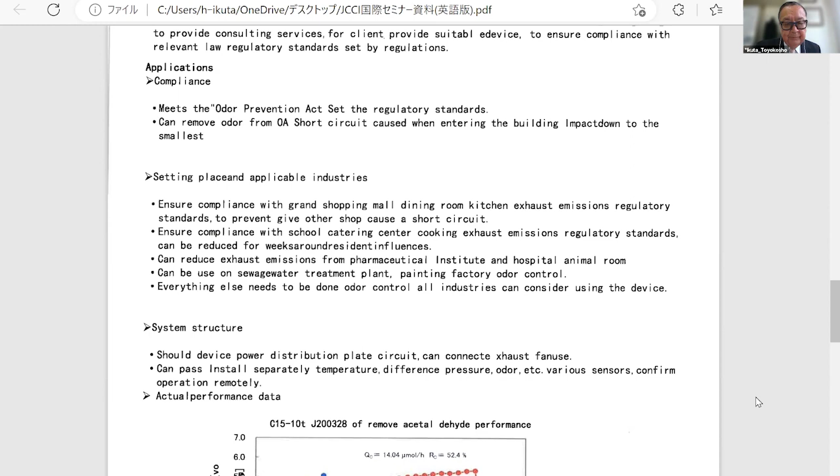Now, where you will set it up - you can set it up in various places, but I guess a shopping center will be the largest example of our application. If you go to these large shopping centers, they want to make sure that the odor from restaurants and kitchens doesn't seep through so much, leading to complaints. This device can also be used in school kitchens, or maybe pharmaceutical research centers, hospitals, wastewater treatment facilities, printing facilities, painting facilities. In any case, wherever people have an issue with odor, this technology can be applied.

The structure of our system - basically we only use electricity, so there's really no motor or fans. The fans will be provided by the facility owner. Going forward, we're going to try to introduce remote monitoring, so temperature, pressure, odor, and leakage of electricity, all of that should be handled by sensors as we try to control the operation remotely. This would lead to reduction of maintenance cost as well. That is what we are currently working on.

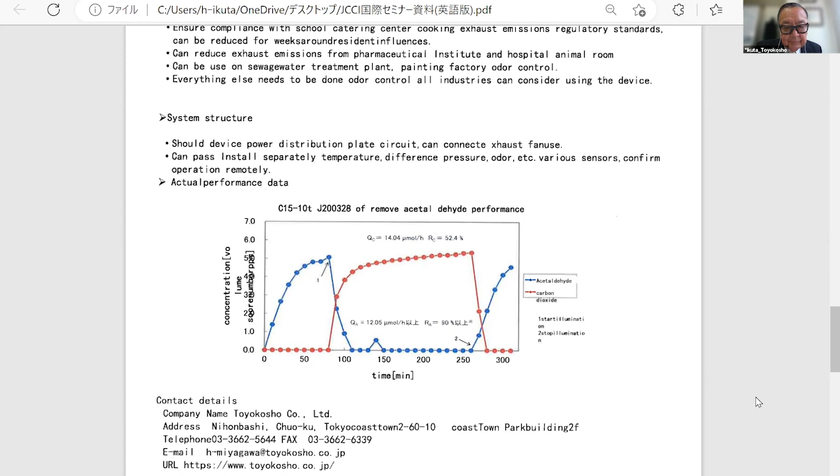This is the acetaldehyde removal performance, the decomposition of the odor. The blue is the concentration of acetaldehyde, and the red dots are the CO2 addition. When you decompose organics, you get CO2 and water, so if more of the organic materials turn into CO2, you can see how much decomposition took place. Toluene and other components like methyl mercaptan can also be measured, based on the ISO standards. So all of that can be measured.